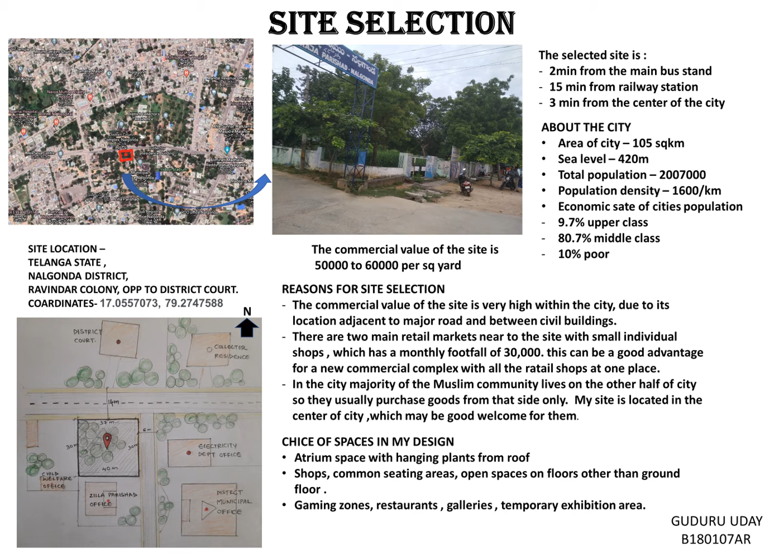And also the site is very near to the main bus stop and railway station. Due to its location in the center of the city, both sides of the city can equally access a commercial complex designed in this site.

As per the given problem, we were expected to choose the spaces which we are going to place in my commercial complex design. As per my observations in the locality, I have listed a few spaces which are running very well in the current scenario, and I have included some spaces which I thought will be raising a good income.

Almost 60% of the town's population is children and young people, who prefer to play games, but there is a lack of indoor gaming spaces in the city. So I thought of including the gaming zones. Remaining are the food stalls, offices, open spaces, shops such as spa, electronics, footwear, clothing, jewelry, furniture shops, and home decor shops. And I came to an assumption of an initial zoning of the commercial complex in my design.

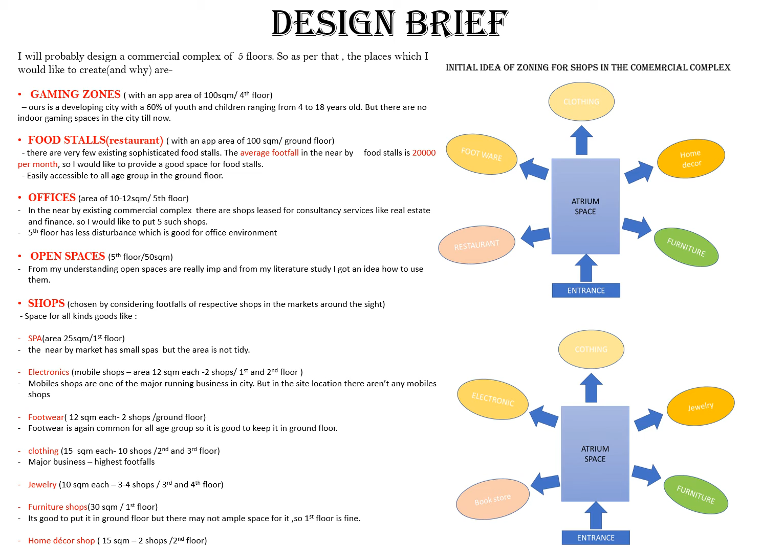Coming to the literature case study, the one which I selected is 0914 Flagship Store, which is located in Gangnam, South Korea. The site area is very relevant to the given problem site area. I kind of like the idea where the architect managed to pull out more built-up area from a small site area. This kind of helped me in analyzing how to bring more space without the problem of less site area.

And the other one is the live case study, which I chose in my locality. This is a new existing commercial complex, and this gave me an idea how things work in my locality. I have studied the building thoroughly: the circulation of the space, the parking details, and what kind of shops are running well in the locality. This helped me in understanding how design works in my particular site area.

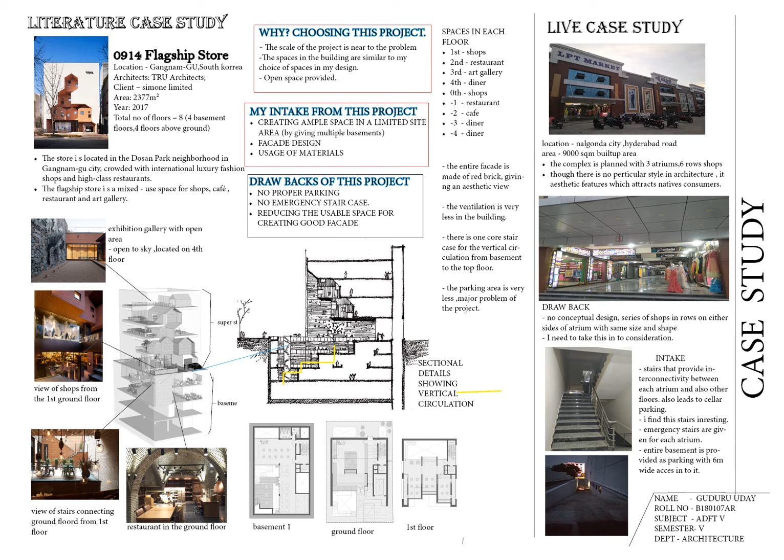These are the municipal building rules in the city. I have mentioned the different setbacks according to the abutting road as well as site area. As per the location of the site and area, the maximum permissible height of the building is 18 meters. It has an abutting road of 14 meters on the main road, and a second abutting road of 6 meters.

So according to that, the setbacks come as the front setback of 4 meters, the back setback of 3 meters and sides of 3 meters. As there is an additional road on the other side, the setback on that side is 5 meters. The maximum permissible coverage is 65%, the maximum built-up area is 3000 square meters, and FAR is 2.5 without any additional fee, and 4 with an additional fee.

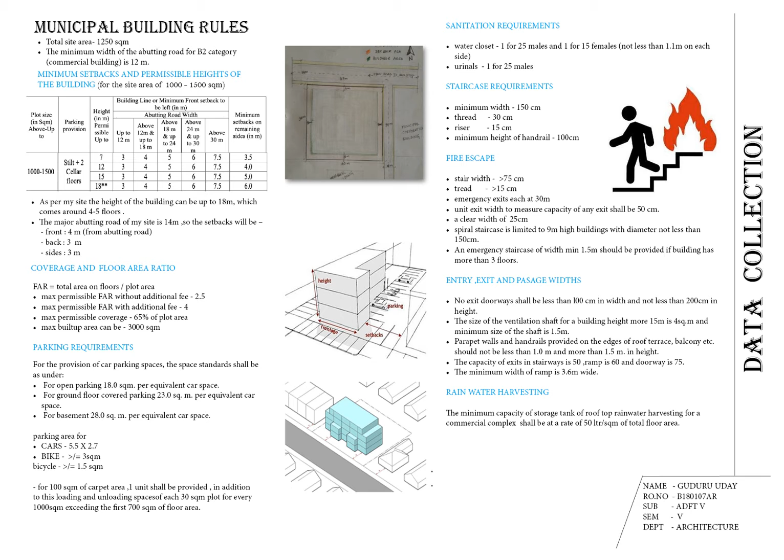And these are some additional details regarding the fire staircase and standard entry and exit passages, as well as rainwater harvesting and other working details.

Site analysis. The site is located in Nalgonda district, Telangana state, India. The site is at a sea level of 420 meter, and these are some of the average weather conditions analyzed throughout the year. The site is located 500 meter from the nearest hotel, 3 kilometer from the nearest park, and the railway station which is 4.5 kilometer, and the main bus stand of 1 kilometer far, and it is very near to the center of the city.

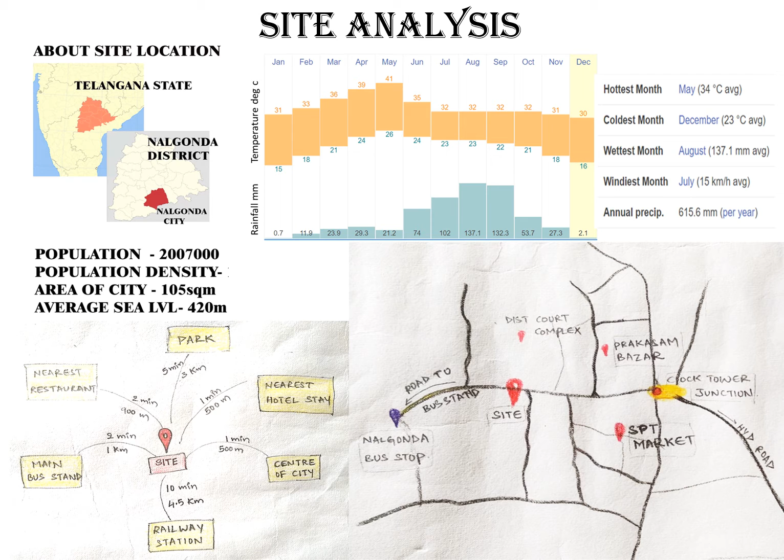There is no major vegetation in the existing site except for average plants such as neem and bamboo. There is an existing abutting road with a 3 meter entry, and the major abutting road is 14 meter, and the secondary abutting road of 6 meter. Speaking of the area details, the total area of the plot is 1272 square meters, and the buildable area after removing the setbacks is 866 square meter. And according to the bylaws, the permissible FAR is 2.5, and the maximum coverage is 65% of the plot area.

And the wind blows from the southwest direction of the site, and there is observed a major noise pollution from the main road into the plot. The topography of the plot is flat to the maximum, and the soil type is red sandy clay.

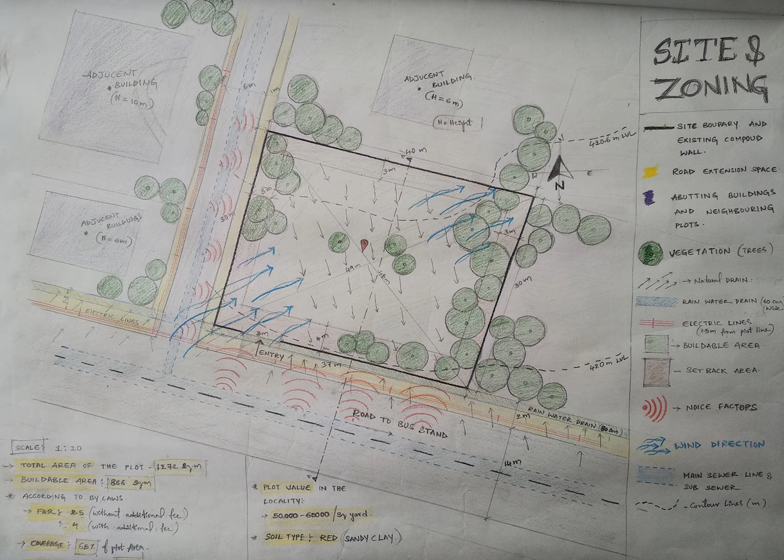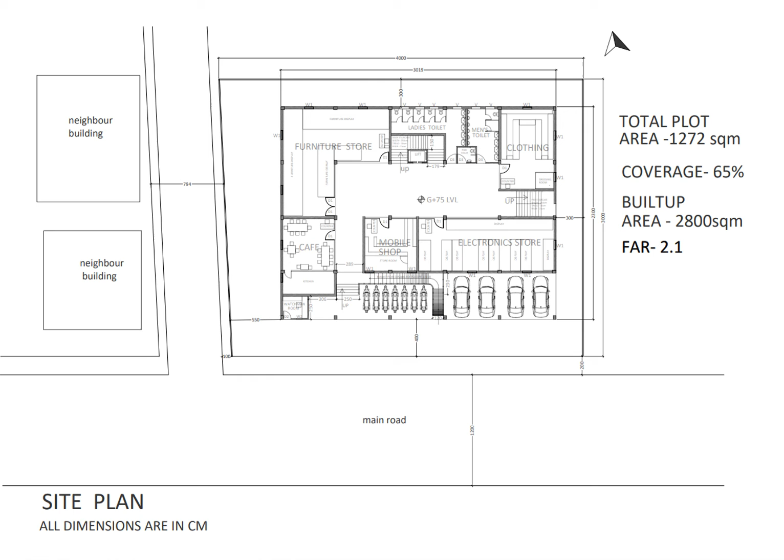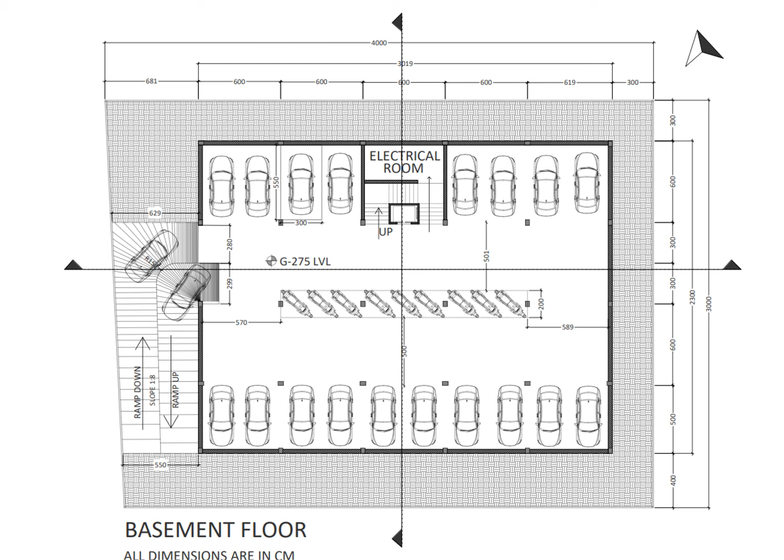This is the basement floor showing cellar parking. Here I have managed to provide 18 car parking and 9 two-wheeler parking. The ramp has a slope of 1:8 with a width of 550 centimeter, which is very comfortable for 2 cars to pass. The cellar has access with the elevator as well as the central staircase on the upper floors. There is an electrical room.

In the ground floor, I have managed to provide 4 car parking space and 8 two-wheeler parking space. I gave spaces for shops such as cafe, mobile shop, electronic store, clothing and furniture stores, and other details regarding toilets as well as staircases. I have given the profile for door, windows, ventilator.

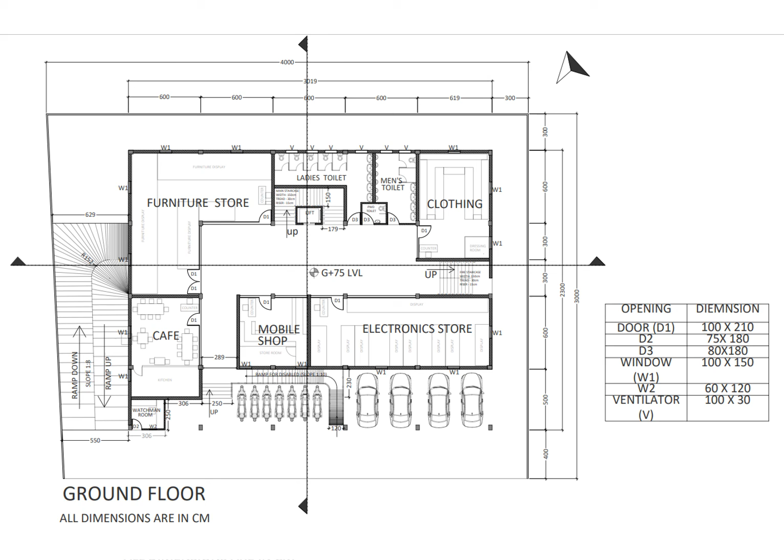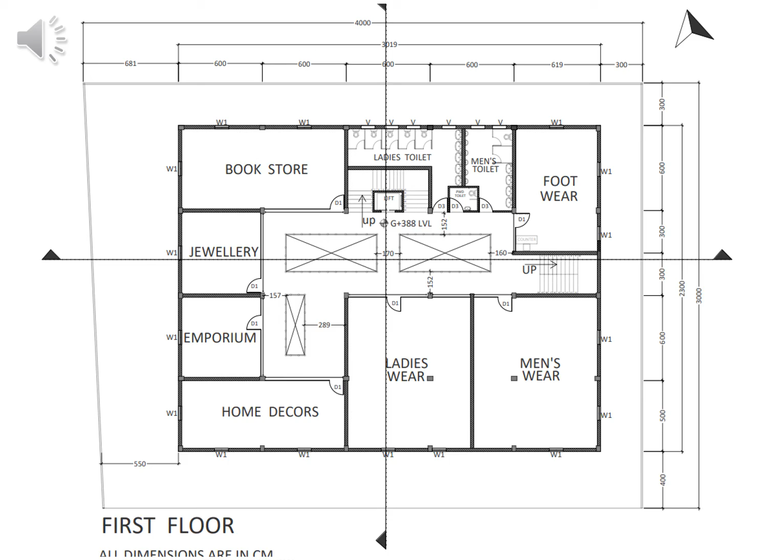This is the first floor. Since there is no parking area occupied in this floor, I kind of extended my shop areas. Here I provided mainly clothing for men and women, jewelry, footwear, bookstore and home decor shop. I have provided an emergency fire staircase of width 2 meter.